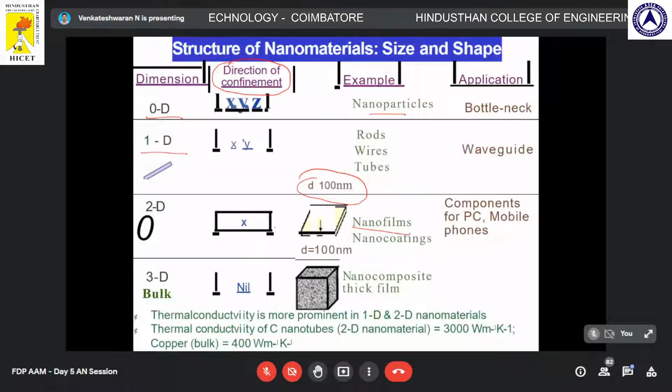So then we can classify it as a one-dimensional material. And a two-dimensional material, the materials are confined on two axes, x, y or y, z, or any of the two planes. Some of the examples are films which we are developing for biomedical application or wound application, or nano films which may be used for water barrier, gas barrier applications, filtration, water filters, or the absorption of oil spills. So those are some of the examples of nanofilms.

And nowadays these nanofilms are being used in mobile phones. And 3D is nothing but a three-dimensional object, where the nanocomposite is formed as three-dimensional. So all three, x, y as well as z, will not be confined to any region.

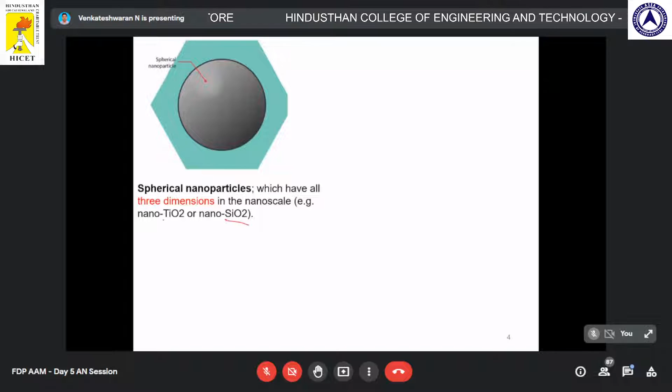And next, for 1 dimension or 3 dimension, how will the shape be? The shape for a 3-dimensional object will usually be spherical. Some examples are TiO2 and SiO2 in nanoscale. So these 3-dimensional nanoparticles are spherical in shape, and some examples are nano TiO2 or nano SiO2. Then we will move into 2-dimension, which is nothing but nanotubes, rods, wires.

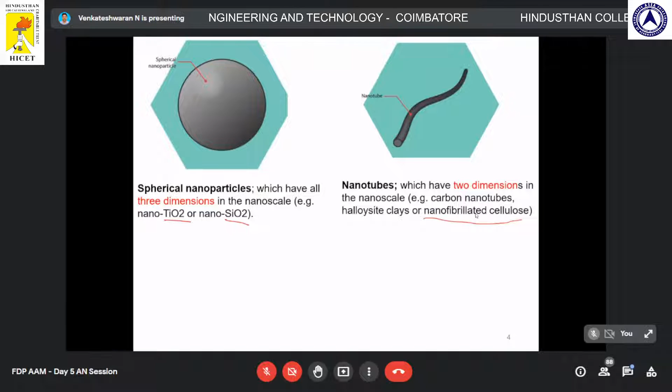So carbon nanotube, nanoclays, and nanofibrillated cellulose. Cellulose from the plant fibers. Cellulose is one of the main constituents which gives strength to the plant fiber. Then we will have 1-dimensional, which may be platelets. Some of the examples are graphene nanoplatelets, hexagonal boron nitride, bentonite clays, which are some of the examples of nanoplatelets.

And so why have these nanomaterials been used, or on what factors do these nanomaterials depend to provide us better properties? Here we are comparing material whose size will be either macro or micro. These properties, mechanical, optical, thermal, magnetic, electrical, for a bulk material depend first upon the structure the material is made of, whether it is FCC, BCC, or hexagonal HCP in nature. So first is based on the structure of the object.

Then it should be defect free. It should not have any defect. These are the two main considerations for a bulk material to have good properties. Whereas for nano-sized material, it depends upon the size of the particle, whether it is 1 nanometer, 100 nanometer, or 1000 nanometer in size. Next, whether it is 1 dimension, 2 dimension, 3 dimension, or 0 dimension: shape. And next, the surface area to volume ratio. This is the most important characteristic of any nanomaterial.

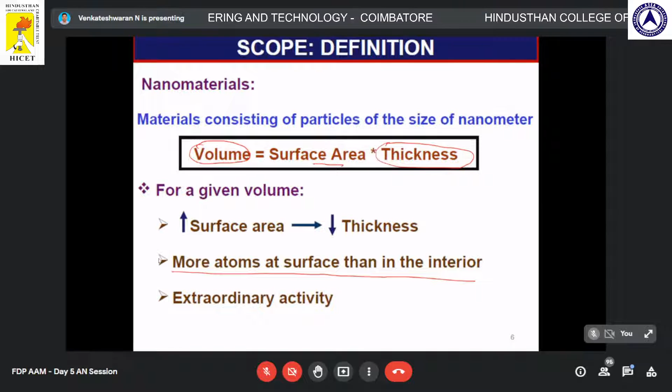Again, there are different ways in which nanoparticles are termed. The first one is called a nanocluster, which is nothing but a collection of a minimum of 50 units of nanomaterials. Then we call it a nanocluster, a collection of about 50 units of atoms.

The second is nanocolloids, which is nothing but a stable liquid phase which contains particles. The particles collide and form an aggregate. These liquid-phase nanomaterials collide among themselves and form an aggregate, so they are called nanocolloids.

The third one is nanoparticles. Nanoparticles are nothing but solid particles, especially in the range of 1 to 100 nanometers. They could be nanocrystalline, an aggregate, or a single crystal in nature. The nanocolloids are in the range of 1 to 1000 nanometers, whereas nanoparticles are in the range of 1 to 100 nanometers. Again, they may be either non-crystalline or crystalline in nature.

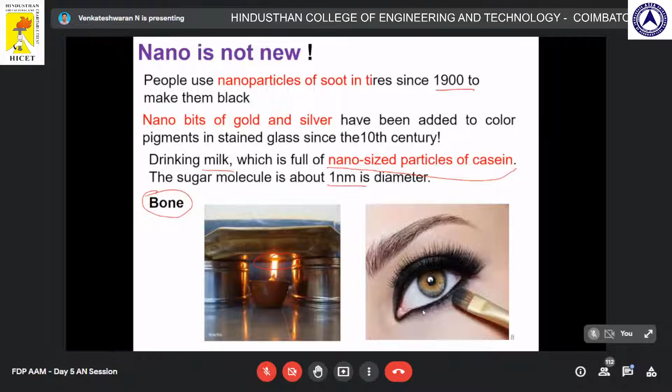Okay. And generally how they have been produced, why we are using it, and it is not new, then how we are going to manufacture it. Okay. So basically they will be manufactured either by the ex situ process or in situ process. In the ex situ process, they may be done by the physical way or by chemical route.

The nanoparticles can be prepared either by the physical method or mechanical method, like ball milling, CVD, chemical vapor deposition, right? Sputtering, or some of the physical way by which the nanoparticles are made. Similarly, by chemical, sol gel process is widely used, a chemical process of extracting the nanomaterials.

So when we have to go for ex situ process, once if we are going to produce in bulk, right? The need is large, or we are going in for a mass production, then you can go for ex situ production. Next, I want the reproducibility. Okay, so whenever we are going on for nanomaterials, all the nanomaterials will not be of same size. The particle sizes will be distributed.

If you have taken some 1 gram of the nanoparticle, in that itself, all the particles will not be of 100 nanometers. So it will be in the range. The range may be from 50 to 150 nanometers. So this nanometer level reproducibility is very much important, especially for bulk producing.

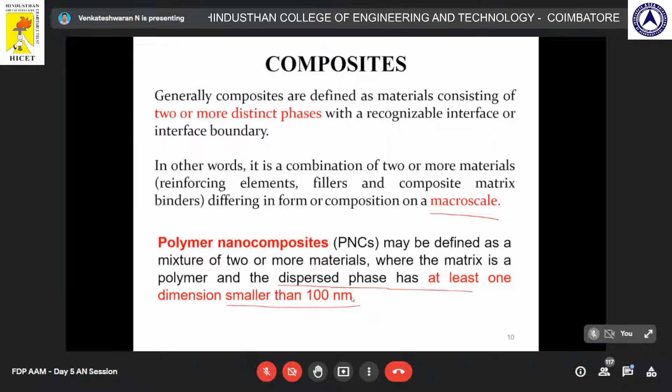Because the composite will have 2 or more distinct phases, both in physical as well as in the chemical form, if any one of the phases is of nanometer size, then we are able to call that a polymer nanocomposite. Okay, then how are these polymers generally classified? As you know, they are generally classified into thermoset and thermoplastics.

This thermoset, once you have melted and molded it, you cannot remold, because they have been formed by strong bonds, covalent bonds. So it is very difficult to break those bonds once they get settled. That is why the thermosets have very high strength, right? Because the bonding between the atoms is very strong, so they cannot be remolded.

Some of the examples of thermosets are polyester, epoxy, formaldehyde, or some of the vinyl esters. Their atomic bonding is very strong, so it cannot be broken once it is settled or molded. Whereas on the other hand, in the thermoplastic, the atoms or molecules have been formed by weak bonds, which we can call weak van der Waals bonds.

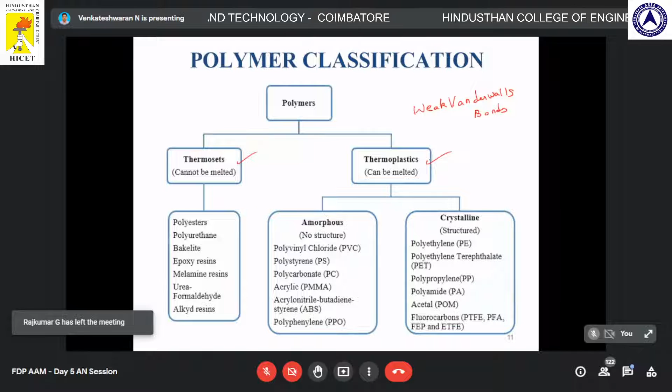Thermoplastics are bonded with weak van der Waals bonds. So the bonding between the atoms can be easily broken when we reheat it, so they can be melted even after being formed. They may be amorphous or crystalline in nature. PVC, polystyrene, polycarbonate and ABS are some examples of amorphous, and polyethylene, PET, polypropylene, polyamide nylon and POM are some examples of crystalline nature.

So thermosets, why can they not be remelted? They have strong covalent bonds, whereas in thermoplastics the bonds are weaker. They are bonded with weak van der Waals bonds, so on reheating the chains can easily break and we are able to remold it.

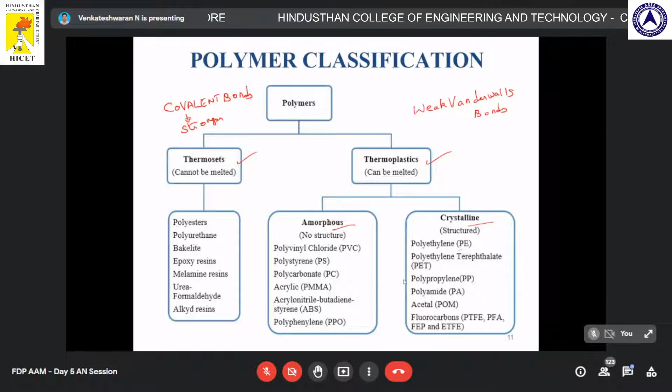And what are nanocomposites? They are composites in which you have nanomaterial either in volume ratio or weight fraction in the range of 0.5 to 5% only. As per the available literature, you can alter the properties with a maximum of 5% weight or volume ratio.

So what will happen beyond that? They will form more agglomerates, or they will collect at a single place instead of a uniform dispersion of the nanomaterial, so we cannot get uniform strength throughout the material. Because of these reasons, nanomaterials are usually added in the range of 0.5 to 5%, either weight or volume.

Then how are these nanofillers classified? Basically they are classified as organic and inorganic materials. The organic materials are nanofibers or whiskers in nature, such as chitin, starch, cellulose and chitosan. Those are the organic nanofillers added with polymers. Inorganic may be either a nanoclay or metallic nanoparticles.

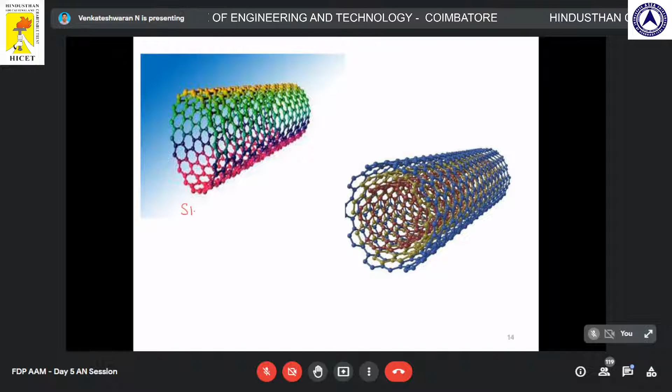This is a figure of a single-walled carbon nanotube. We have only carbon, rolled in the form of a rod. Whereas here it has multiple levels of carbon nanotube, so we call it a multi-walled carbon nanotube. If these carbon tubes, instead of being circular in shape, are opened, they form a two-dimensional pattern like this.

Then we call it graphene. A two-dimensional carbon is what we call graphene, versus a single-wall carbon nanotube or a multi-wall carbon nanotube. If it is two-dimensional, then we call it graphene.

That is one difference, and another difference is that in the carbon nanotube the carbon percentage will be from 90 to 95%, whereas graphene will have something in the order of 99% carbon. That is why graphene is also called a wonder material. The 99% carbon is what we call graphene.

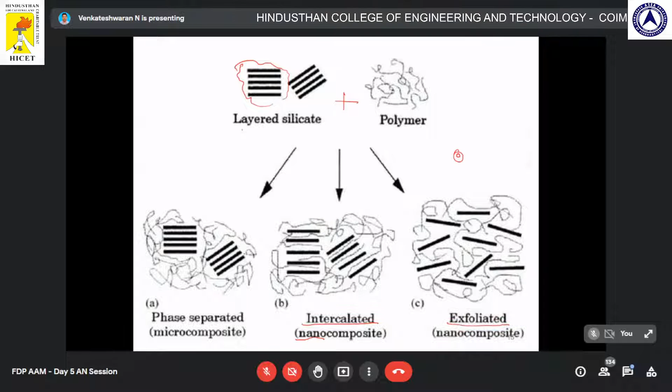So if an entire complete layer of silicate has been surrounded by a polymer, we call it a phase separated microcomposite. If each layer is surrounded by the polymers, we call it intercalated nanocomposite, and if the silicate does not form any pattern and has been surrounded by the polymers, then we call it an exfoliated nanocomposite.

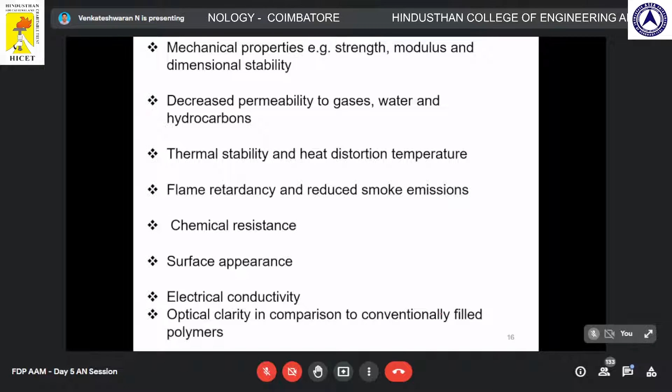Why are we going for nano? Because of better mechanical properties, like strength and modulus, or better dimensional stability. Dimensional stability of the material is also important, because when the material is exposed to different environments, the dimensions of the product should not deviate. You can use the material at 40 degrees, at 60 degrees, or at minus 10 degrees, and under these conditions the dimension should be stable.

The next reason is that it decreases the permeability of gases, water, and hydrocarbons. These properties are very important especially if you are going to make biofilms or packaging materials. Gas barrier properties are important because when a material is packed and exposed to oxygen or the atmosphere, it should not permit the oxygen to pass into the packed material.

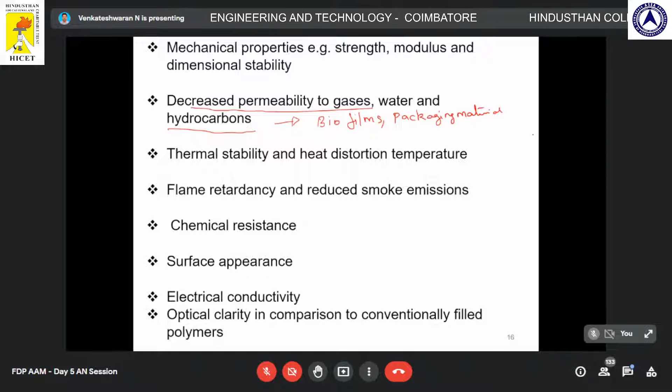For example, take a biscuit packet. The wrapper around the biscuits, kept in different atmospheres, usually at room temperature which may vary, should not permit oxygen or any other gases to go inside. If it goes inside, what will happen to the eatables? They lose their crispy property. Any packet, it may be Lays or Kurkure, has these barrier properties.

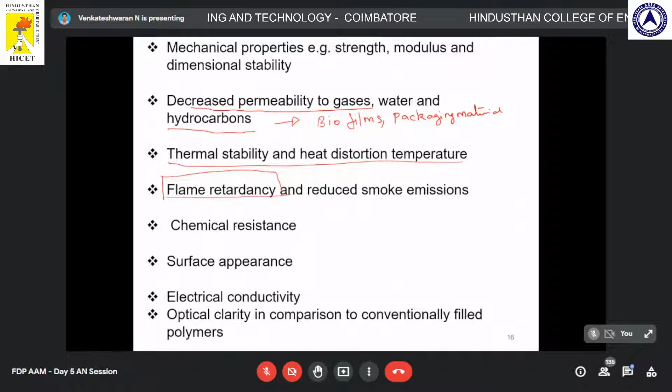Another important property we mostly don't consider when doing research is flame retardancy and smoke emission. We say we use polymer composites for automobile applications, which may come across fire accidents. You can make a dashboard or headrest in the automobile, or a chair for a passenger in a railway station or inside a train cabin, which may be exposed to fire accidents. So flame retardancy is very important for automotive applications.

Sometimes glass fibers are widely used to make cylinder tanks for carrying chemicals. Next, for better appearance, better electrical conductivity, and sometimes optical clarity. Nowadays the glass specs we wear have been replaced with polymer glasses, and they say they cannot be broken even if dropped to the ground.

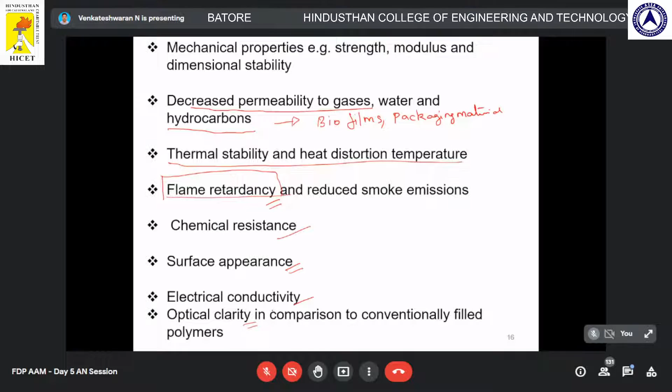Similarly, the holder for the specs or glasses, all are being converted from the conventional metal to lightweight polymers, right? At the same time, when we use a polymer for the specs, they will tell that it is scratch free, smudge free, fog free, etc. So all these can be improved or incorporated using these nanomaterials.

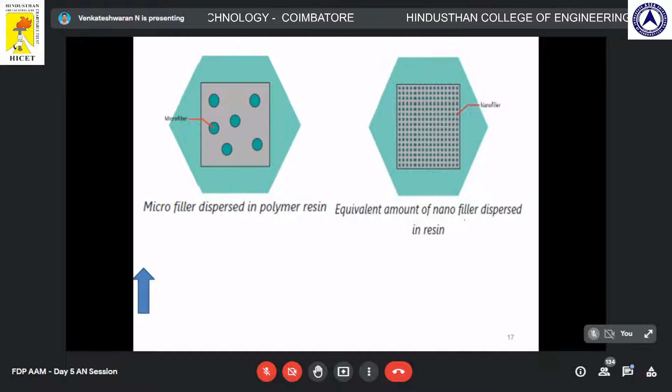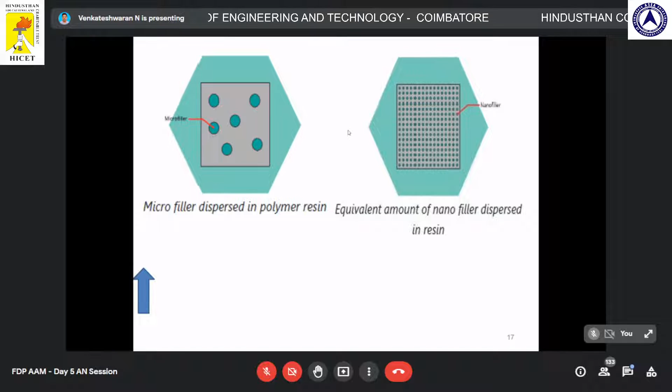So what will happen? I get more surface area. As I get more area, the material can withstand higher strength, or it will have higher stiffness, right? So those properties can be improved. This is how nano fillers, even at a very low filler percentage of 2%, 3%, provide better mechanical or thermal properties, because they occupy more fillers in a given area compared with micro fillers. So these will take up more of the load.

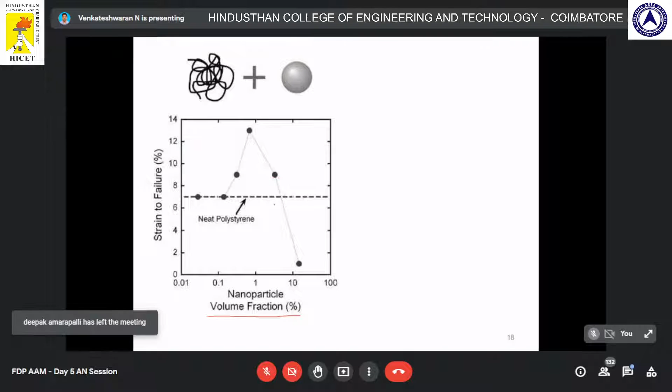The physical meaning of an increase in strain to failure is that it has more strength bearing capability or capacity. So increased strain to failure is also a reason for our improved mechanical properties. Mostly we discuss tensile strength, tensile modulus, flexural strength, flexural modulus. You can also discuss strain to failure as evidence, because we always want to know why at 10 percent volume ratio or weight percentage my material has lower properties, whereas at 20 percent my properties are improved. One of the reasons is that the strain to failure increases, and that increases the strength.

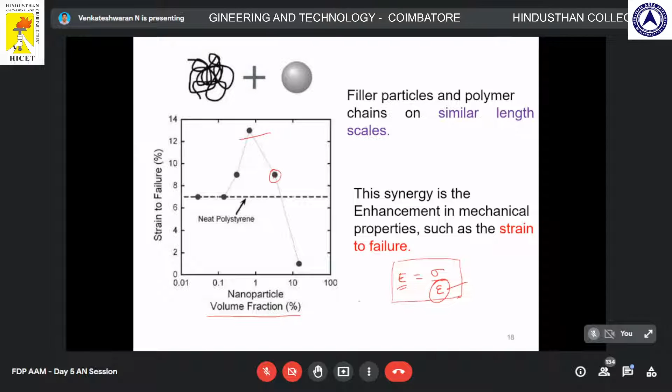So we have stress equals E times strain, right? By Hooke's law, stress is directly proportional to strain, with an elastic constant called Young's modulus E. So you can discuss this. What will happen if my strain increases? The modulus decreases. For the same amount of stress, if my strain to failure increases, the modulus decreases. These are some of the cross checks that as researchers we have to carry out. So modulus decreases, but strength increases.

Next, we say that it improves the fracture toughness. How does it improve the fracture toughness? These nanoparticles divert the crack propagation. Suppose this is a crack propagating over a surface. If there are no particles, it will move in the forward direction and break. If I have some micro or nano sized particles, they will deflect the crack. As it deflects the crack, the area of crack propagation or the time taken for the material to fail increases. Thereby you can increase the lifespan of the material.

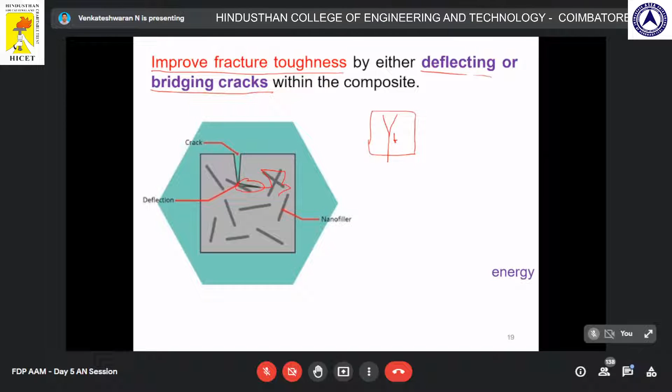So it deflects or bridges the crack. This is deflecting the crack. Thereby I can increase the fracture toughness of the material. It deflects the crack here, so it will go in a different pattern, or it may increase the time to reach failure. Here it is deflecting the crack. The next one is that it bridges the crack.

It is just like when we are making stitches, right? It is stitching the crack. So as it stitches the crack, this nanoparticle will take the load. So thereby it also improves the fracture toughness, either by deflecting the crack or by bridging the crack.

Thereby it absorbs more energy, so the time taken for the crack to reach the material end surface, or for complete failure of the material to occur, is longer. So these nanomaterials absorb and dissipate the energy, right? So it reduces the crack propagation speed.

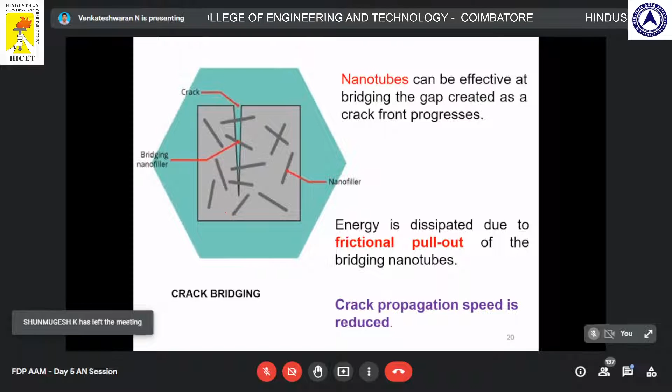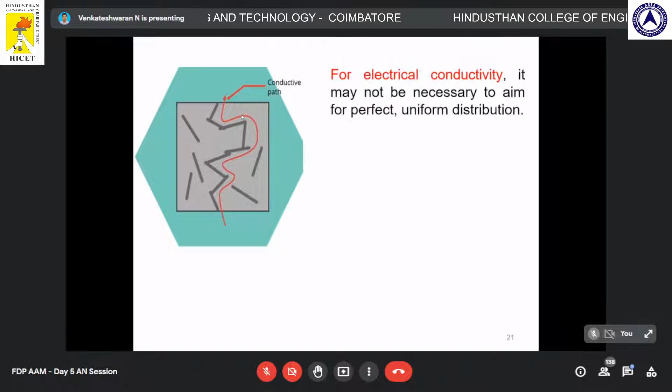Next is the gas barrier property, which we have told earlier, right? When these nanomaterials have been arranged in a random fashion, just like the crack propagating in a single phase, the gases reaching from the initial path to the final path take a longer time. So thereby I can improve the gas barrier property, or similarly...

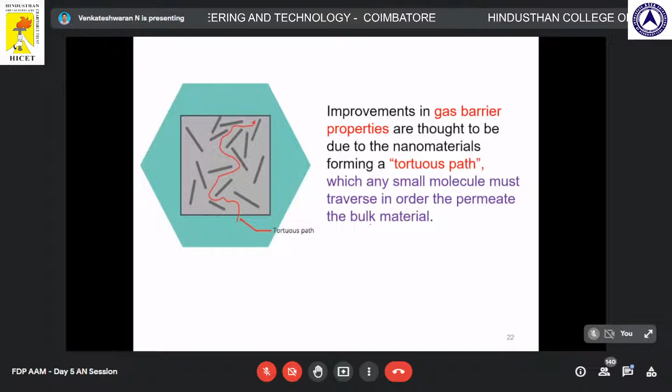Here, the particle should not be uniform. Dispersion of the particle is not required for the case of electrical conductivity. Next one is called the gas barrier property. Since they have been arranged in a non-uniform pattern, the gas follows a different path to reach the exit. So thereby it improves the gas barrier property, or it reduces the particle losses.

Next is the flame retardant or flammability property. So how does this nanoparticle enhance the flame property? As you burn, this layer will burn initially and deposit a char. These initial layers exposed to the flame or heat deposit the char over one another. So this char, or these broken particles, act as a barrier for the flame to reach from the initial position to the final position.

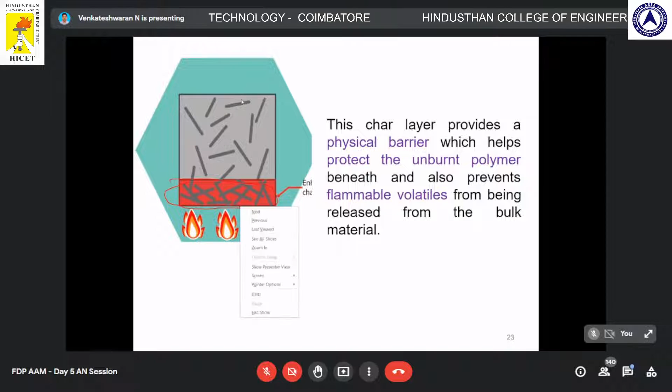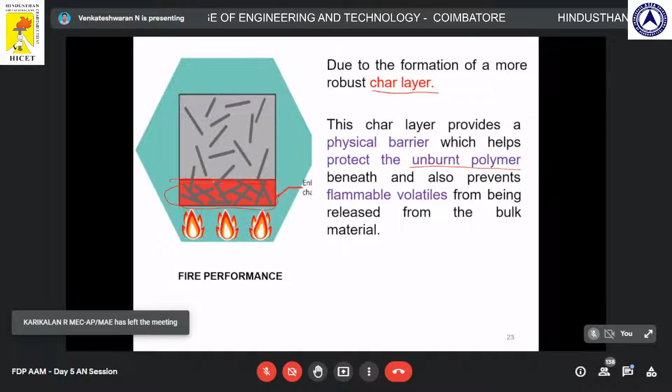This char layer acts as a barrier, right? So thereby I can improve the flame retardancy, otherwise called the fire performance of the material. So they form a char type of layer, and thereby it restricts the flow of heat to the unburnt polymer. So thereby it enhances the fire performance of the material.

So we have seen the different properties of nanomaterials. Then how can we manufacture polymer based nanomaterials? The first one is in situ polymerization, in which the monomer and the nanofillers are mixed and kept for some duration so that the polymerization occurs and the solvent evaporates. Once the solvent gets evaporated, we pour it into a mold to get a three-dimensional nanocomposite. This is the simplest method by which nano polymer composites can be prepared.

So you'll have a monomer solution in which you disperse the nanomaterial and allow the polymerization to occur, and once the solvents get evaporated, pour it into the mold.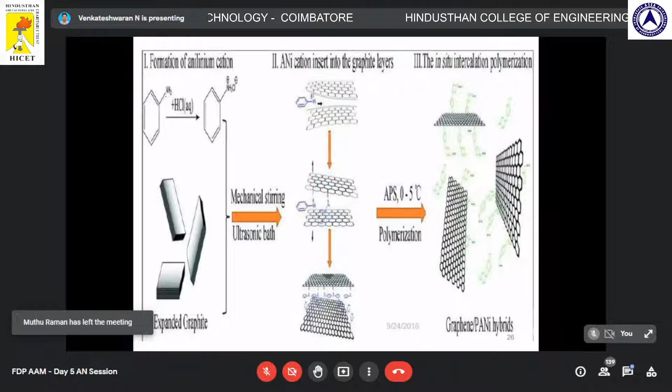And the second one uses especially graphite. You will have graphite sheets which will be mixed with the polymer, and these polymers will intercalate between the layers. Then, when exposed to some temperature, polymerization will occur and they form graphene or nanographene polymer sheets.

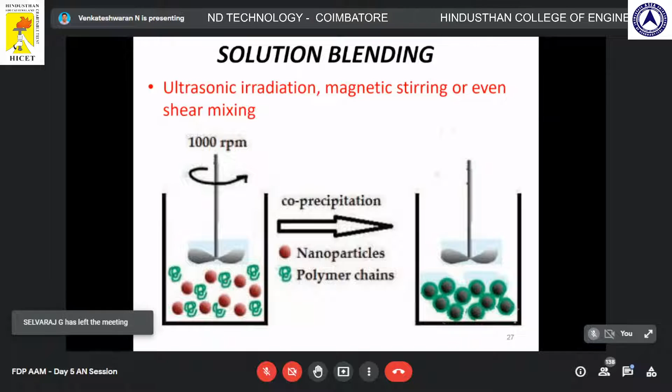The next is solution blending, in which you will have a mechanical stirrer. Both the polymer resin and the nanomaterial are measured based on the volume fraction or weight fraction calculation. You pour it and stir mechanically or manually at a given speed for different durations, and then allow it to settle. The polymer will form around the nanomaterial, and it will be further poured into the mold depending on your requirement.

Next, this is what we have seen earlier. That is the layered nano clay. It is mixed with a polymer solution, either using an ultrasonic bath, a mechanical stirrer or manual stirring, and then allowed to settle down for some duration of time. Then they form a nano clay composite.

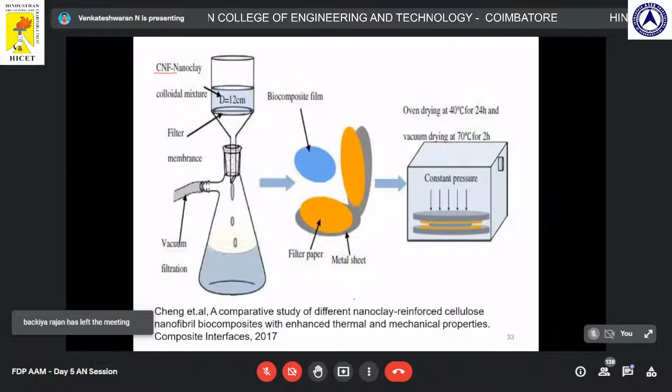And the next one, you are going to use the chemical method. You are going to have nano clay, or cellulose fibers and nano clay. They will be mixed in a funnel and dropped, and a biofilm will be formed, and the moisture in the biofilm will be pressed and taken out. These films will be placed and pressed at a constant pressure for around 2 hours, right? So that nano clay based films or nano clay reinforced cellulose nanofibrils can be formed.

Then melt blending. In melt blending, as you know, we are going to shear the nano material. As the shearing takes place, the particle sizes will be reduced, right? As the reduction in particle size takes place, they will be added to the polymer, and then the polymer nanocomposite will form. Melt blending.

And the next one is the extrusion process, where the polymer, especially thermoplastics, and graphene or any nano materials will be poured into a single extruder, or it may be a double extruder. They will be melted at a preheating temperature, and as the screw is rotated, they will be extruded at the heated part, and here we will have a die. Through the die we are able to take this out and then cool it for a particular time, so that they will form a sheet or a 3-dimensional nano material.

Okay, and then once you have made it, we need to characterize it. First you need to characterize the nano materials, either by wide angle X-ray or small angle X-ray scattering to know the crystal size or nanomaterial size, and then you can go with TEM, AFM or SEM, right? To analyze whether uniform distribution of the nano clay was achieved or not.

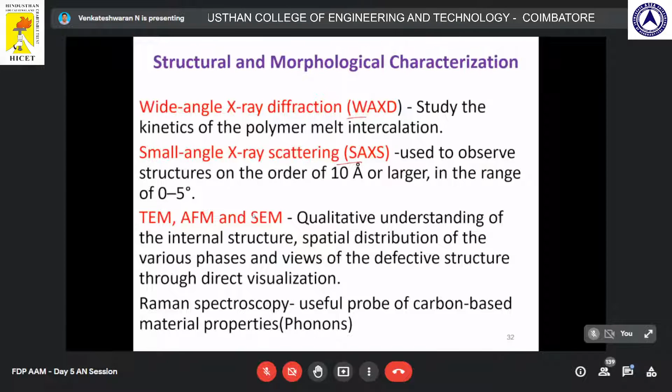Next you can go for the mechanical characterization like tensile, compression, flexural, as per either the ASTM method, ISO, or the European committee, right? Any one of the standards has to be followed. Other than that, we also have some standards driven only by companies, like Boeing specification tests, Suppliers of Advanced Composite Materials Association tests, Composite Research Advisory Group, and European construction material for aerospace applications. These are company specific standards, but the most widely used are either ASTM or ISO standards.

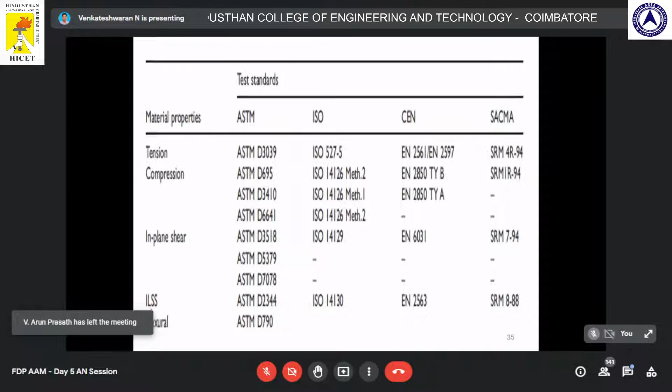And these are various standards available for finding out the resin content, fiber content, void content, etc. Then tensile test, compression test, in-plane shear stress, interlaminar shear stress, flexural stress, and there are different standards. And for thermal analysis, and to analyze if any chemical changes occurred, you go for FTIR, Fourier transform infrared spectroscopy, or Raman spectroscopy. Then you can go with the thermogravimetric analyzer to analyze the weight residue, and then dynamic mechanical analysis to know how temperature and frequency affect the storage modulus, loss modulus, and loss factor of a material.

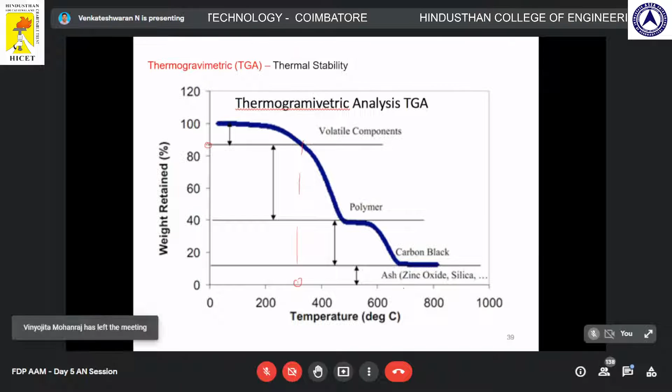Okay, that is what has been given here. A general TGA analysis test will tell us, as you heat to different temperatures, how much weight has been retained, right? Till something around 350 degrees, I am able to retain around 85% of my weight. This region is the volatile components. Next, the polymers are burned off. Then finally, carbon black will be burned off. Then the residue or ash will be left. A typical thermogravimetric analysis curve.

Similarly, we have a DMA curve. The blue color shows how temperature affects the storage modulus, in other words how the energy absorption capability of the material is affected by temperature. And the red color shows the loss modulus. Loss modulus is nothing but energy dissipation, how much energy has been released in the form of heat by the material, and how it is affected, and this green color will give the tan delta.

The peak of the tan delta will provide us what we call the glass transition temperature, the temperature at which the polymer begins to soften. Okay, and also it provides how much damping or loss factor has occurred. So here they have done it from -100 degrees to 150 degrees centigrade.

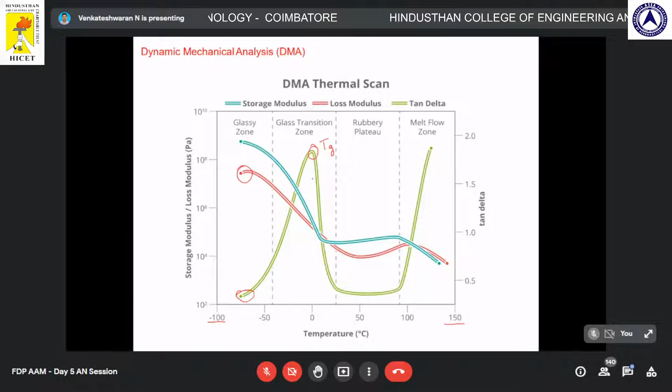So the value is depending upon the applications. The temperature depends upon the application, so up to what temperature I can use the material without any loss in my storage capability, that I can analyze. Now let us come into it.

Nano clay. So natural fibers. Basically they are classified based on whether they are extracted from plant, animal, or mineral. The plant fibers are also called cellulose fibers or lignocellulose fibers. They are extracted from the stem or bast, leaf, seed, fruit, wood, stalk, or grass, right? They can be extracted from any part of the plant.

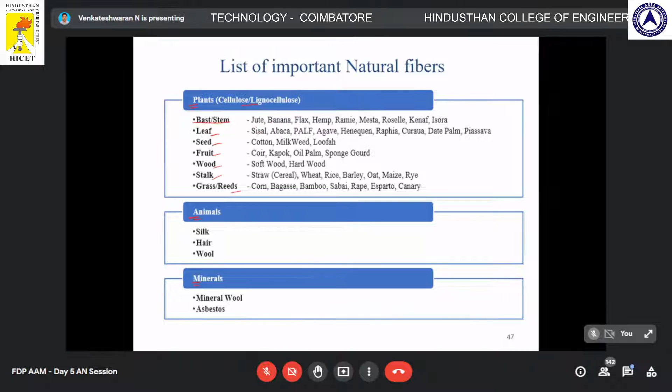It may be jute, banana, or leaf: sisal, abaca, pineapple leaf fiber; then seed, cotton is the best example. From the fruit, we have coir, oil palm, sponge gourd; then grass: corn, bagasse, bamboo, or the varieties of grasses from which plant fibers are extracted.

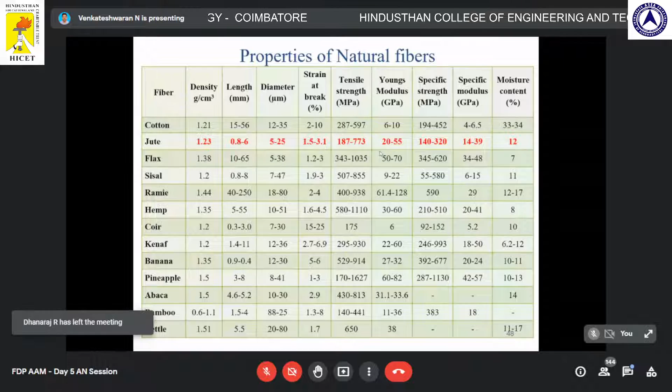Why are we going for jute fibers in this work? A comparative study of various properties like density, length, diameter, strain to break, tensile strength. Especially in our country, jute is the topmost fiber available next to cotton. So jute fibers are widely available, and when compared with sisal, coir or banana,

you can achieve a constant cross section of the fiber in jute, because the jute extraction process is completely mechanized, whereas other fiber extractions are manual. Cotton and jute fiber extraction and processing techniques are 100% mechanized or automated, so I can get even properties. These are some of the literatures.

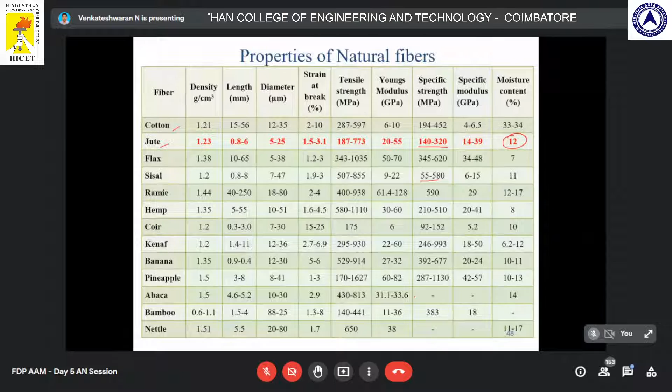But the moisture content is very high, around 12%. But if you compare the specific strength, which is the strength divided by the density, it ranges from 140 to 320. Whereas sisal ranges from 55. Bamboo is a little bit higher, 383. Pineapple leaf is 287, but it goes up to 1130.

These variations in the properties are always attributed to the property of the final composite, because the place in which the natural fiber is cultivated and the way we extract it provide these properties. Natural fibers are most widely used as a secondary structural member, not a primary structural member, because of moisture and their low load carrying capacity.

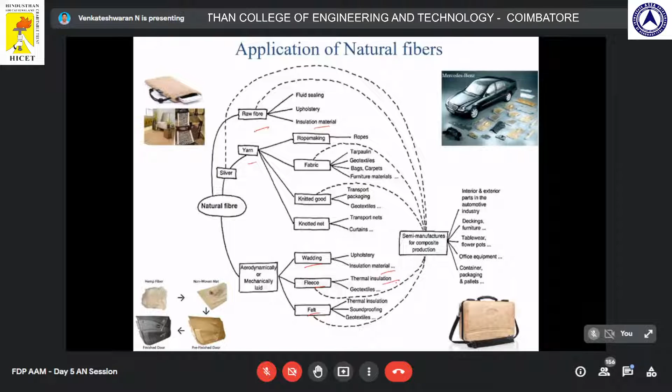So these are being used as raw fiber, as insulating material, yarn, fabric, knitted goods, and with fleece and felt they are used for thermal insulation, soundproofing or sound absorption material, etc. They are also used as interior and exterior parts, decking, tableware, office equipment, containers, etc.

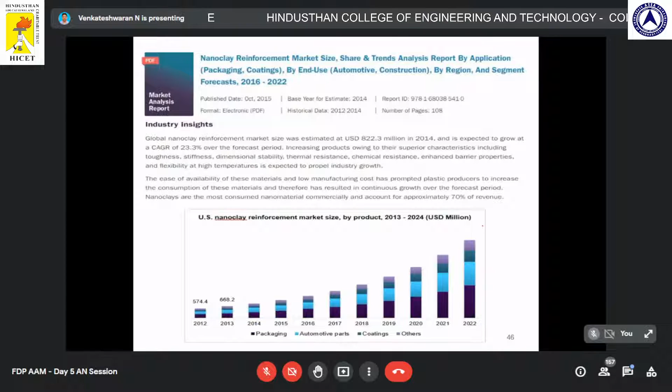So why nano clay? The use of nano clay as reinforcement, especially in automotive components and packaging, is continuously growing. Second, they have a good market as they are used widely, compared with metal oxide based or CNT based, because the properties they provide for the cost are very high. As seen earlier, these are various kinds of nano clay available.

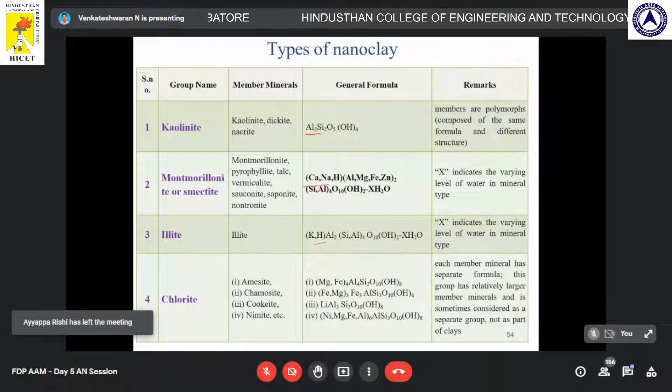So aluminum silicate is called kaolinite, calcium based is called montmorillonite, and potassium based is called illite, chlorite. So again, this chlorite is magnesium based or iron based, lithium based or nickel based. Okay, so here we have used the montmorillonite, and these are the specifications of the material, and this is how a montmorillonite will be prepared. And here we have used it because of exfoliation. Exfoliation is where they can be arranged in a random manner, not in layered silica, right?

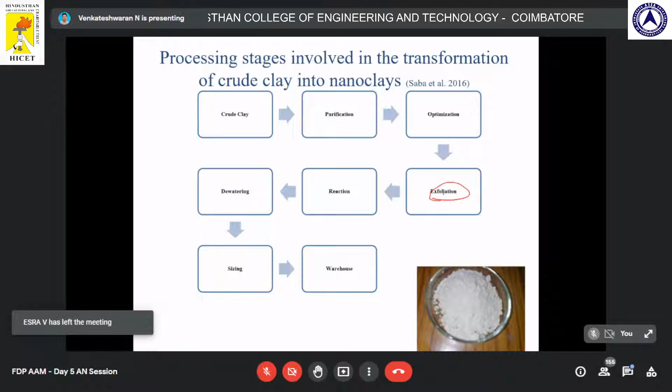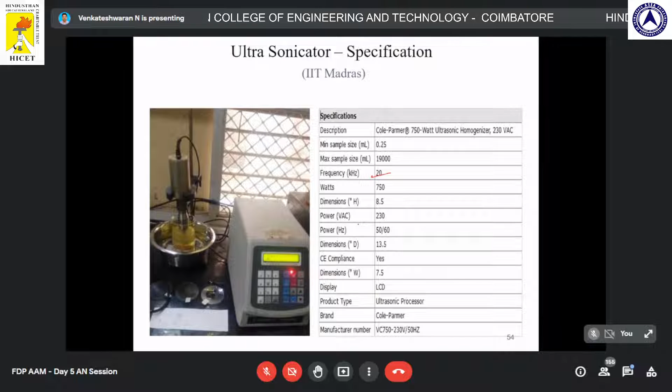So first the nanoclay was observed in the SEM with EDAX to show the material with silica as the peak value. So it confirms that it is made of silica as the maximum material. Second thing, we used the ultrasonication process with a bath. The frequency at which we can operate is a maximum of 20 kilohertz. So I need to optimize the parameters: how much frequency I have to use, and how much will be the resting period or gelation period.

So first we have done it with 100%, that is 20 kilohertz, for a duration of 30 minutes. And from this, as I lift it out after 30 minutes of duration, it forms agglomerates. So I cannot use this for my preparation. So I have varied it for 30 minutes, 60 minutes, 90 minutes duration. Next, we have done it with 50%, again with 30 minutes, 60 minutes, and 90 minutes. For the optimum value or uniform dispersion, we found that it is still in the liquid form and the nanoclay was dispersed. So next we have to analyze these materials. With the naked eye we are saying it is okay, but that is not enough.

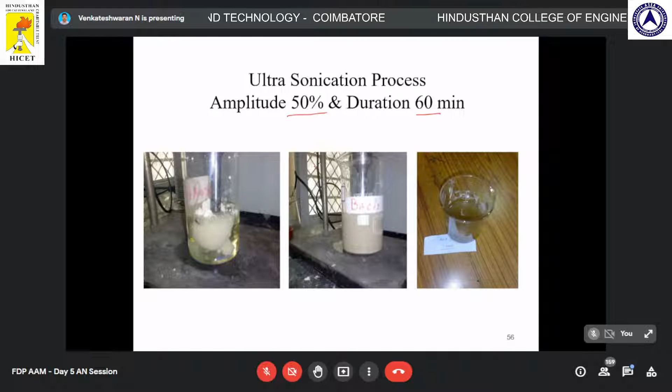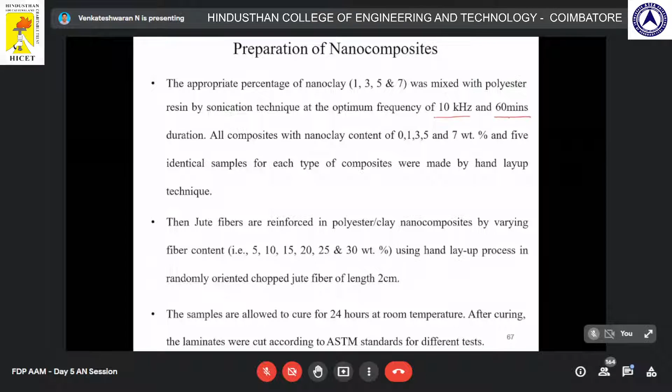Okay, so next I will add different weight percentages of nanoclay, 1, 3, 5, and 7, and my optimum is 10 kilohertz and 60 minutes. Here we have used the hand layup method, the vertical type, so that air bubbles will be negligible or absent compared with the horizontal type, and there is no need for a roller. So these are the various plates: neat resin with 1%, 3%, 5% and 7% nanoclay. And this is with the jute fibers.

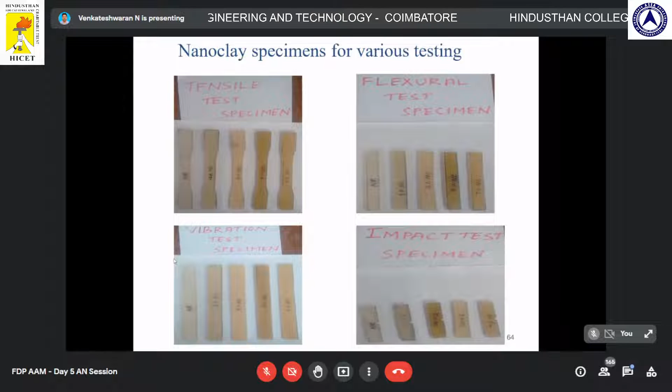Then this is 5% jute, 10% jute, 15%, 20, 25 and 30% jute fiber plates. Next are the tensile, flexural, impact and vibration testing specimens of all the products: nano clay, neat resin as well as jute fibers. These are the various tests which are carried out, and these are the results.

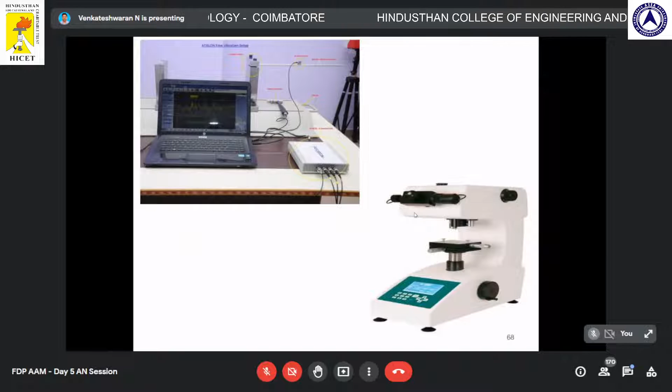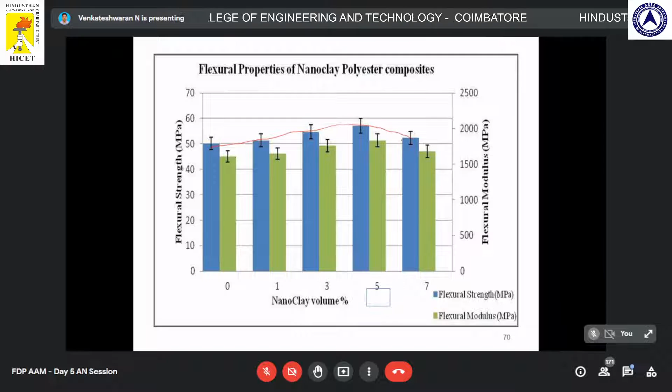0% is nothing but the polyester resin, and with the addition of 1%, a slight increase. Blue color indicates the flexural strength and green indicates flexural modulus. With the addition, it slowly increases and then it starts to decrease at 7%. For tensile strength, at 5 volume percentage I am getting the maximum value. Similarly for the flexural, it increases slowly, reaches the maximum value and then decreases. Here also I am getting it at 5 volume percentage, and for impact, the resistance to failure is very high.

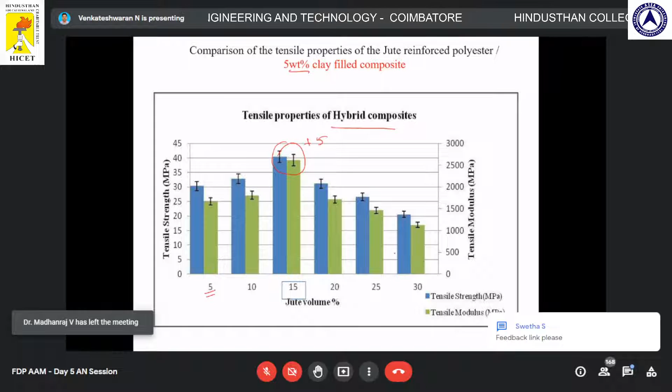Next, 5% provides the better tensile, flexural and impact properties. So I will take this 5% nano clay as the better property, and this will be added with the jute fibers to produce a hybrid composite, by varying the jute fiber as 5, 10, 15, 20, 25, 30. When the percentage is around 15 volume percentage with 5% of nano clay, here also volume percentage, I am getting better tensile strength.

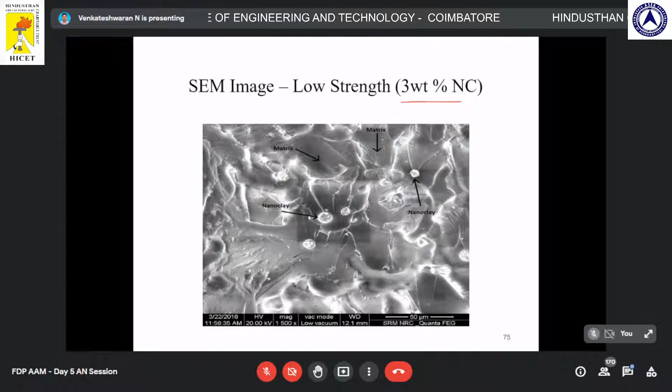Whereas at 25 weight percentage of jute, I am able to predict: with 5% at 15 weight percentage I get better tensile strength and impact, whereas at 25 weight percentage I am getting better flexural properties. And the reason: this is for 3 weight percentage nano clay. We can see the distribution of the nano clay over the surface is very low. Whereas for the 5%, it was distributed throughout the surface, and hence provides better mechanical properties. That is the reason why 5% nano clay is better.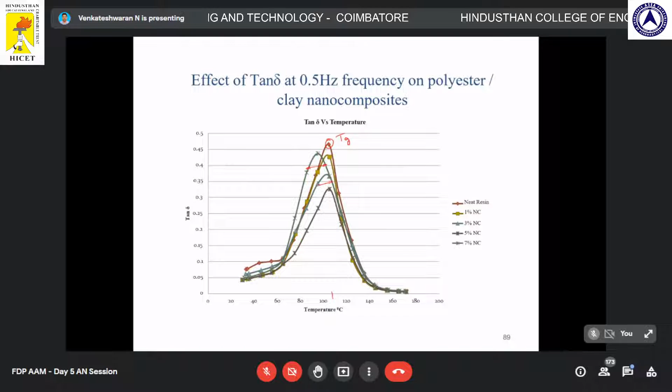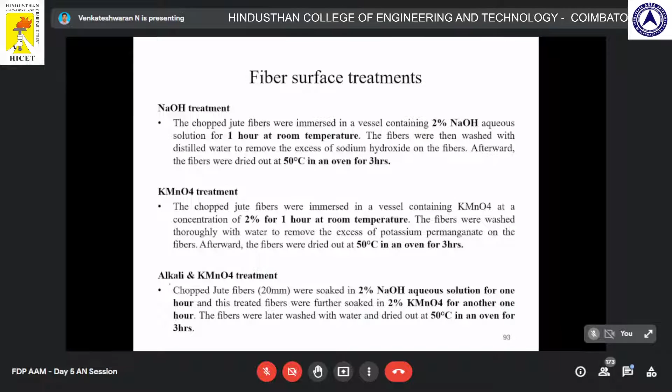So to summarize this, we have a table. The glass transition temperature increases up to 25.8% of jute, whereas at 30 it starts to decrease. Yes, of course, the difference. If I compare it with the polyester resin, the difference will be very high. Next, we have done the chemical treatment, one with NaOH, KMnO4, and then a combination of these. So with this, I will conclude it.

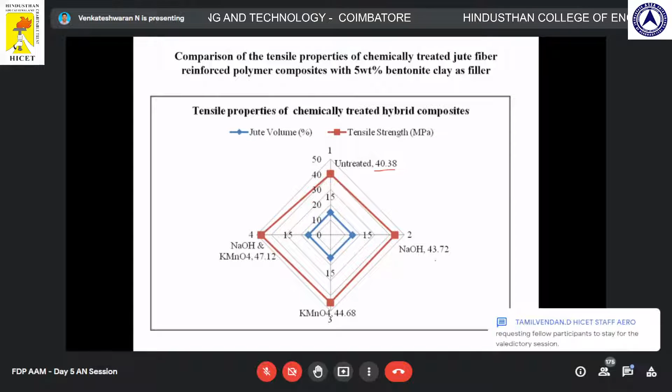So this is NaOH treated fiber, that is 2% of NaOH. Here also 2% of KMnO4, and here 2% of NaOH, 2% of KMnO4 was treated. These fibers have been used for fabricating the plate, and again the various tests are conducted. For untreated fiber, the tensile strength is 40.38, with NaOH it is 43, with KMnO4 it is 44.68, and with the combination of these two it was increased to 47.12.

So the combined effect of NaOH and KMnO4 will provide us the better tensile strength. Similarly, the flexural started with 166 and increased to 201 megapascal. And for impact strength, started with 151 and moves to 172.

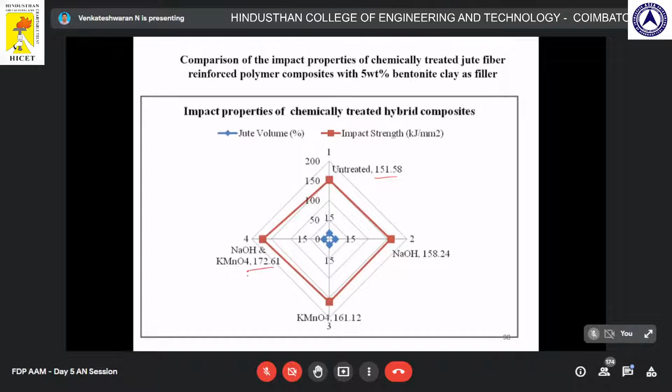And we have to do the FTIR analysis, and from the FTIR analysis, the transmittance and wave number. So we are finding out the different peaks at different wave numbers. Each wave number corresponds to a particular relationship. What has happened? Whether the OH bonding was removed, or whether the bonding between the carbon and the carbon is broken or not, was carried out.

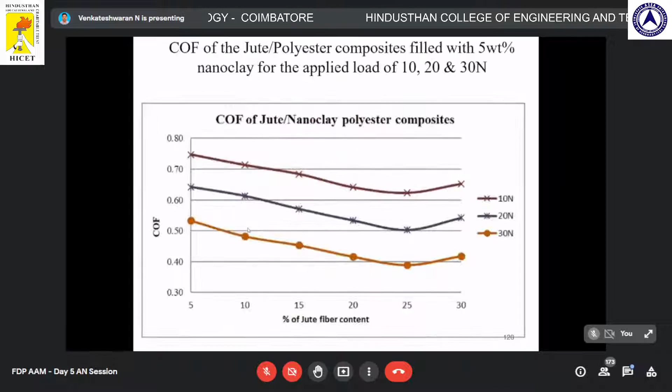And let me go to the conclusion very quickly. Okay. So 50%, that is 10 kilohertz, and for 60 minutes, we got the optimum dispersion time. Better properties are achieved at 5% of nanoclay with 25 weight percentage of jute fibers.

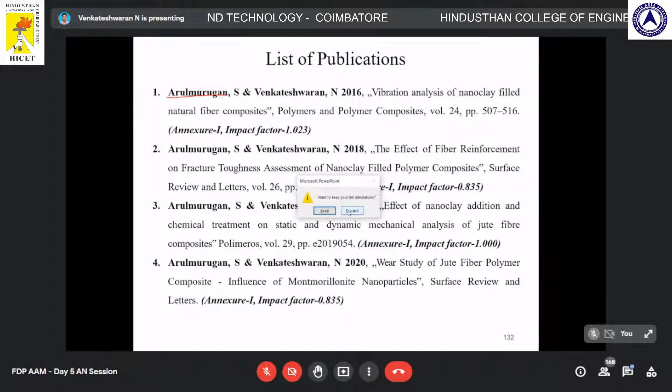What are the sample preparation steps that need to be followed for TEM characterization? TEM. Okay, TEM. Yeah, TEM is here again because it is polymer, right? So if it is a polymer material, we need to gold coat it. So again, the resolution you need

Similarly, how much you want to zoom it, the zoom or magnification factor, right? Those depend upon the equipment specifications. We can have low magnification, medium and higher magnification. Since it is polymer, they will definitely coat it with gold coating, or sometimes they will do silver sputtering or silver coating.

So where you want to do the analysis: if I want to study the fractured part, how the fracture occurred, then you have to cut the fractured part. Or if I want to do the TEM analysis to see the distribution of my nanoparticles, you can take it on the surface. So depending upon your need, if I want to study how the fracture occurs, you cut the fractured portion. It may be either a tensile fractured specimen or flexural. Or I want to study the surface.

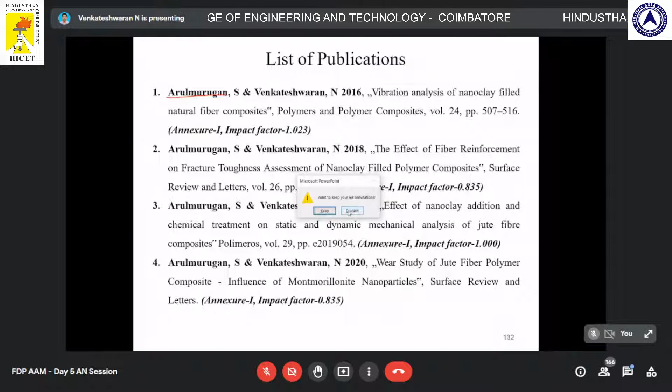Yes, sir. One more question, sir. You talked about the water absorption test, and you have shown the variation of the mechanical properties with respect to the time exposed to the water. What are the methods that you follow for water absorption? Whether you immerse the specimen in the liquid or water, or you keep it in a chamber?

Yes. Here we have immersed it in distilled water. The water absorption can be done in distilled water. You can also do it in sea water, different environments, or you can keep it in a freezer for some time, or you can have it in an AC environment where you have a 16-degree or 20-degree temperature. So here we have done it with distilled water.

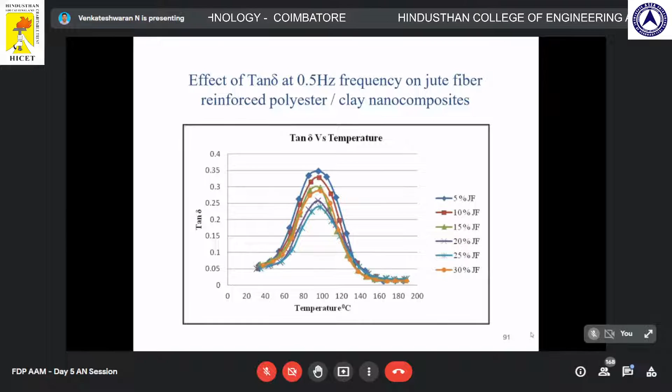We immersed the samples in distilled water and took them out each day. Each day we noted down the change in the volume, the change in the weight, and with that the percentage of moisture absorption was calculated. So here 24 hours was the interval. Each day we measure the weight till there is some saturation level.

That is, when the values over 2 or 3 days are almost the same, we call that the saturated moisture absorption percentage. After that, it won't absorb moisture, or the moisture absorption will be very negligible. So till that time, we have to do the moisture absorption.

I think, yes, thank you, sir. Thank you so much, sir. Is there any other question from the participant side? Yes. This is Dr. Piyush from Hindustan University. I want to ask a question, sir. It is very nice work. Nice to see such good work. Thank you. I just wanted to ask, out of curiosity.

I have seen a lot of studies on nano clay. So what is the main purpose of choosing only nano clay? You could have worked with other nanofillers also, like graphene, maybe bismuth carbide, carbon nanotubes. So what is the main reason for going with nano clay, except cost?

But there are a lot of limitations to composite materials. The researchers here will take a lot of pains with what one mechanical faculty member had said, that a lot of vibrations take place, fatigue strength, fatigue loads of the aircraft. These are all practical situations that we faced in the alclad stream, and I'm sure we'll be facing them now in modern aircraft too. But it is nice and extremely informative, and I'm sure these research papers that have been given will go a long way to improve the aircraft designs, aircraft materials, and the aircraft industry.

Thank you so much for giving the opportunity. I must thank all the participants of this FDP program and all the faculty members, including Dr. Gopinath, who has taken a lot of pains to ensure the FDP program is a success. I hope you all enjoyed it. Thank you so much. God bless. Thank you, sir, for your kind and encouraging words. With continued support from you, we will definitely continue to work like this and conduct such events in future too. So now I may request Professor Veera Manikandan to deliver the vote of thanks for this 5-day FDP program. Over to Veera.

Good evening, everyone. Gopinathan sir is not feeling well; this is for information to Adak sir and everyone. For this reason, I'm delivering the vote of thanks as moderator and co-coordinator of the event. This 5-day FDP has gone well, without any glitches of internet or anything. We are very proud of this. Almost 150 plus participants are here as of now, and registered was nearly 380. We have been continuously monitoring, and the floating population of participants was around 280, because it was online and some had online classes. We don't want to force them, we have cancelled the tests also, and we will forward the link for participants' feedback after this session.